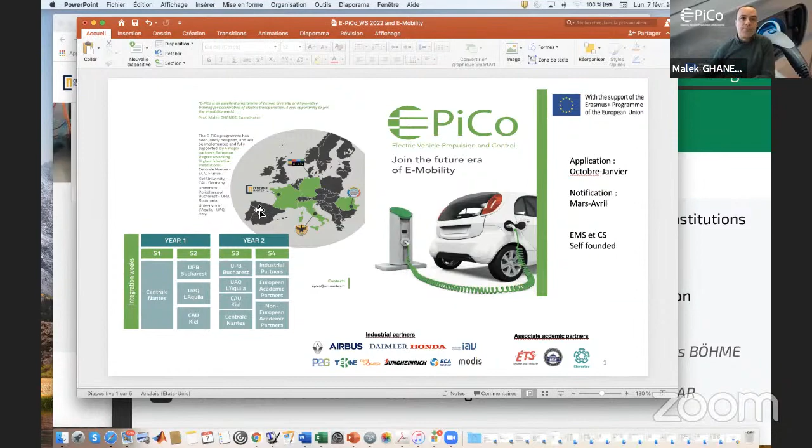So now about the e-mobility control activities at Centrale Nantes. They are mainly focused on the chair program between Renault and Centrale Nantes, as you can see here on the website of this chair. So this program chair is defined around 3 research axes.

The first axis, as you can see here, deals with the control of AC machines and the static converters for electrical vehicle powertrains. So the second axis treats the energy management problem and control of EV, electrical vehicle charging. And the third axis is focused on energy optimization of hybrid powertrain systems.

So the main objective of this program chair is mainly to use advanced methodologies and technologies in the control of propulsion systems in order to reduce the cost of electric and hybrid powertrains, to make EVs and HEVs affordable, while of course keeping a high level of requirements on their performance, operational safety, and reliability.

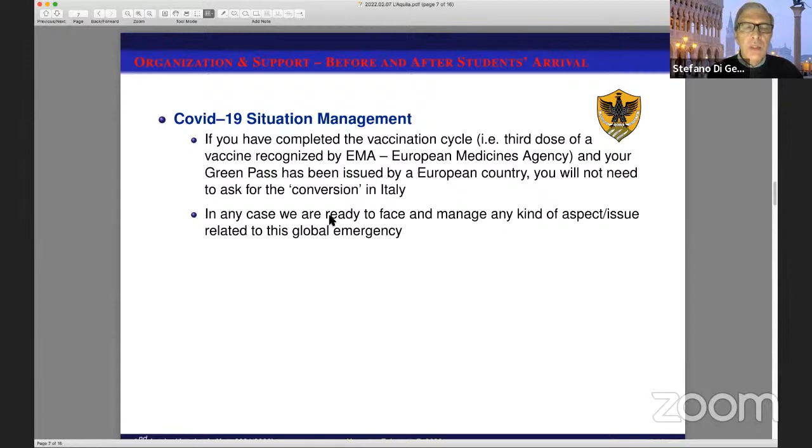I suppose that all of you already got the vaccination cycle. So the third dose, or the Johnson dose plus the booster. So the Green Pass has been issued already in France, I suppose, and you don't need to ask for any conversion in Italy. But in any case, please address to us any question in this regard, and we will help you to do everything that has to be done as soon as you arrive in Italy.

So just to give a glance to the master degree program in L'Aquila, this is hosted in the Master in Computer and Systems Engineering, which has 3 curricula. One is control systems engineering, whose major is automatic control. Then information technology, whose major is computer science.

So just to give a glance to the master degree program in L'Aquila, this is hosted in the Master in Computer and Systems Engineering. I hear a voice. Has 3 curricula. One is... Okay, we had technical problems probably.

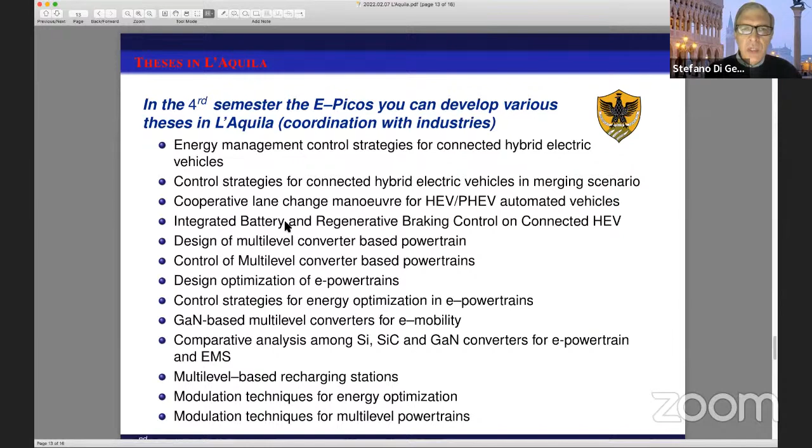Just to give you a quick glance of the educational system in Italy, we have a different way to give you grades, which are numbers from 1 to 30, different from France, which goes up to 20. Then there is a conversion scheme that we agreed with the consortium, in which, for instance, some grades correspond to A, other grades correspond to the letter B, et cetera. So we have a conversion scheme that was established with the consortium.

And yes, I'm the coordinator, Stefano Di Gennaro, coordinator of E-PiCo in L'Aquila, but there are other people that work with me and in collaboration with me, starting from Letizia Giorgetta, who will for sure give you a lot of information and help during your stay in L'Aquila.

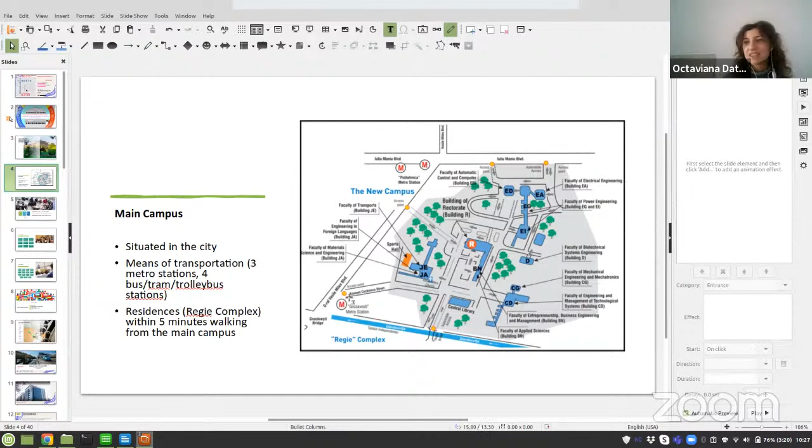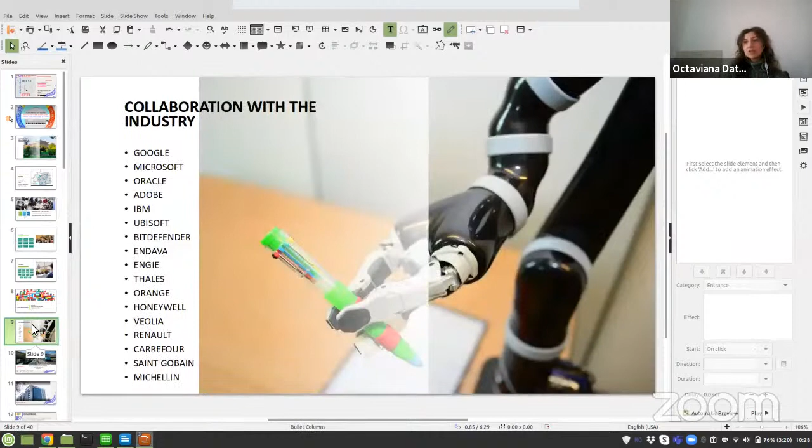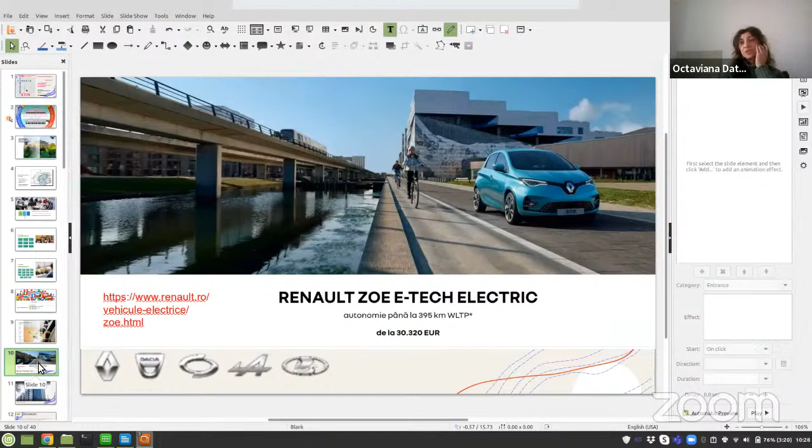Our faculties offer bachelor, master, and PhD programs in several domains. You can visit all the campus, and also participate if you want in some of the scientific activities of all the faculties. We have several programs in Erasmus Mundus, double degrees, European projects, and also multiple industrial partners. Among these partners, we are surely interested in vehicle partners. So Dacia Renault is one of the greatest industrial partners.

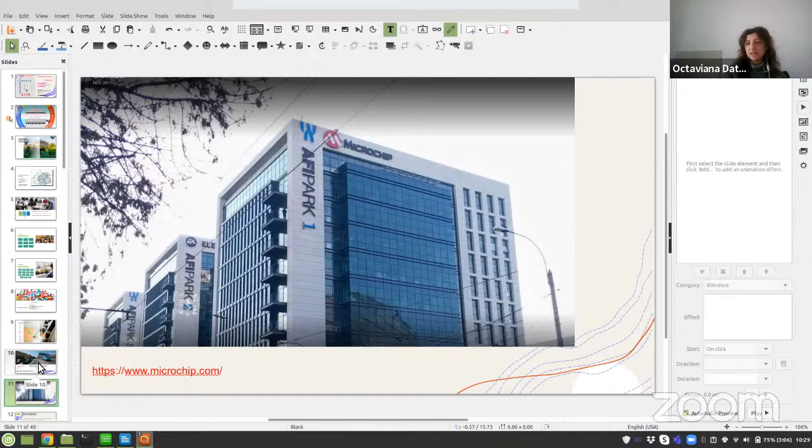Also, Microchip, located a few steps away from our faculty, is a huge industrial partner, who can organize internships if you want. Later these days you will have one of our collaborators talking to you about their activities in Microchip. You will also have my colleague Lucian Perișoară talking these days about the laboratories we have here.

About the electric vehicle propulsion and control local master program, I'm sure you already know that the first 2 semesters are a common curriculum among the academic partners, and the 3rd semester, as you already know, is a specialization semester. So here we have organized a little bit our objectives for this master program, but my colleagues already told you about them.

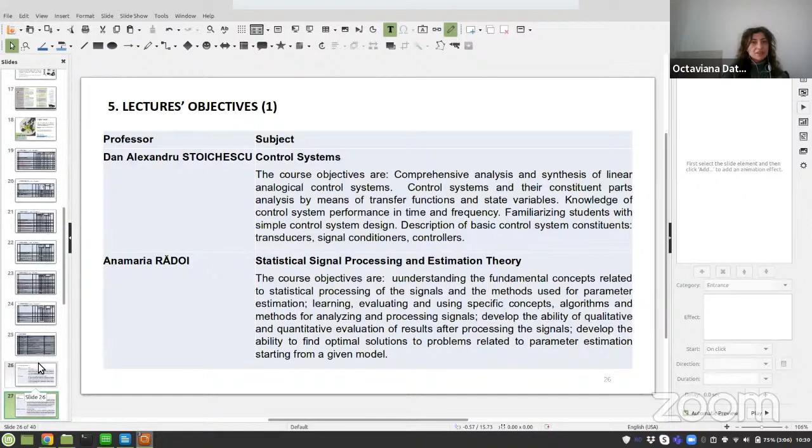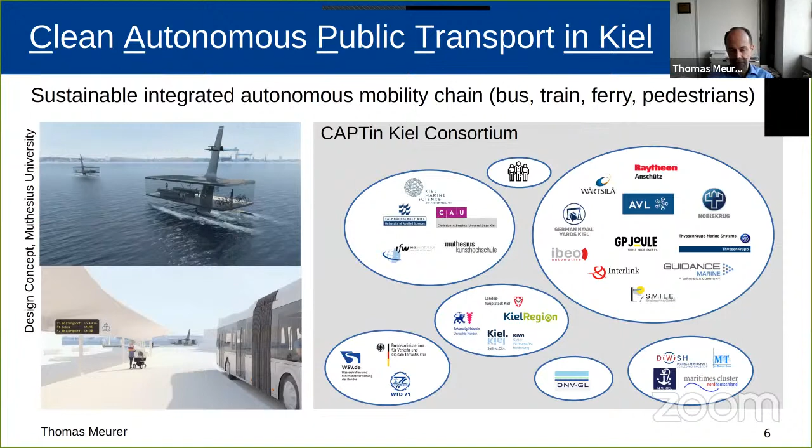Just very briefly, you will have the opportunity to go to Kiel in the second semester. Here we cover different modules addressing power electronics, nonlinear control, and also electric drives, plus a bunch of elective modules that you may choose from.

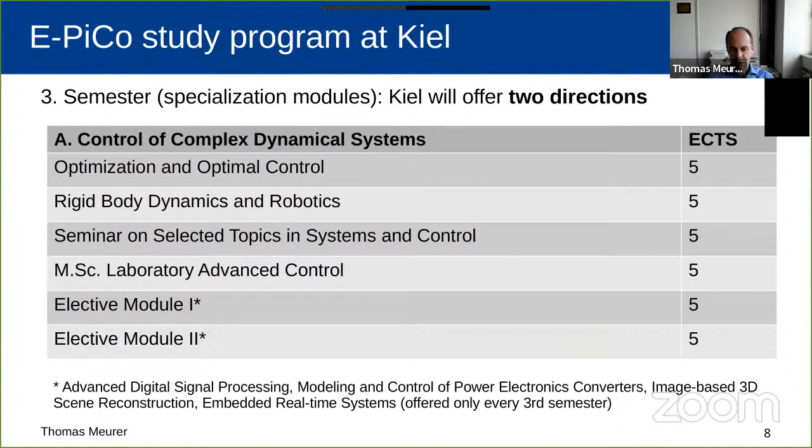If you spend the third semester here, we offer you two directions. I'm responsible for the area about complex dynamical systems and their control, where we look at different topics from optimization to mathematical modeling, and advanced control concepts, plus their experimental evaluation and implementation. The second branch is about power electronics and drives technologies, which Marco LISERRE is responsible for. This is more about electronic converters, intensifying the activities in power electronics, also including a lab plus elective modules. I think this is much more interesting later on when you arrive here in Kiel.

Also, if you come here, you will see that all our faculty is undergoing large construction work. This is due to the fact that we will get a new lecture building that is currently under construction, and also a Center for Networked Sensor Systems, a new research building. Both are going to be built in the next two years. Construction has already started and will go on, as I said, for the next two years, I assume. But then the campus is going to really gain a lot, and we are very much looking forward to that.

Just as a last slide, the team here at Kiel. Besides me, that's Marco LISERRE, who is also going to give a presentation. He's the vice chair of the examination board. Our local coordinator is Dr. Kristin Scholz — you might have already been in touch with her if you have administrative questions — and she's supported by Felix Heute, who is the organization assistant. We also have a website where you'll find our email addresses, or otherwise just look on the web. We are available all the time, and we're looking forward very much to welcoming you in Kiel. Thanks.

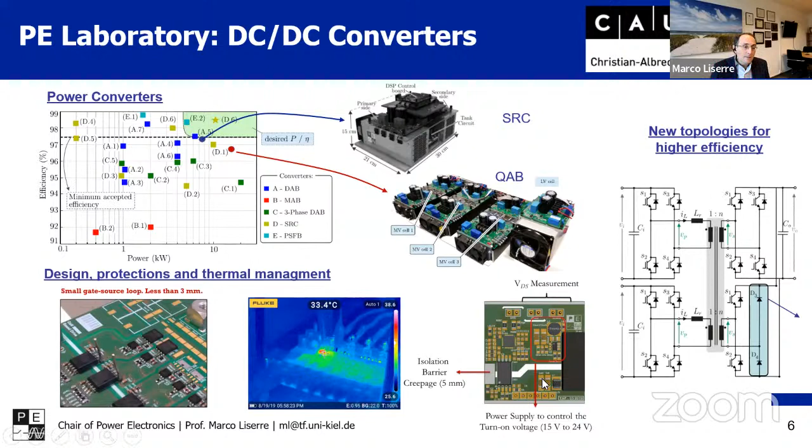That is one example, I say, of the laboratory, but there's also another medium voltage laboratory, which is brand new. We have the possibility to make tests up to 1 megawatt, 10 kilovolts. We have 3 cells, and in each of the cells we can build a different prototype. Charging station is a very important topic here - high power charging stations, we are focusing a lot on that.

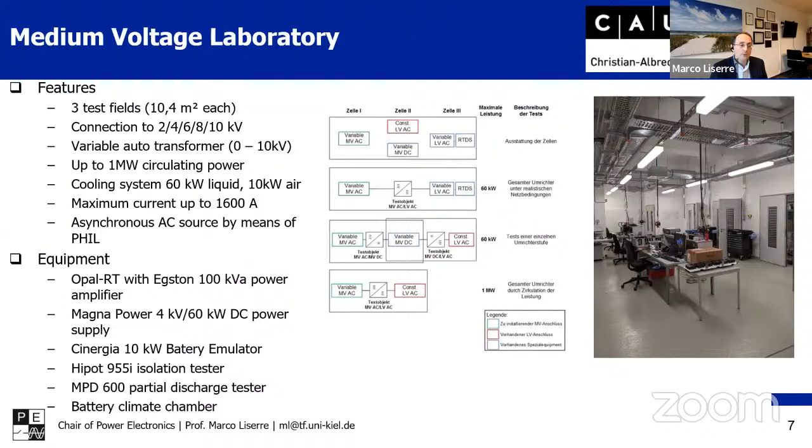This, for example, shows what we have in the single cells. In the first cell, we have the modular multi-level converter, which will be ready in the next 2 years and go into the field to connect a wind park. In cell 2, we have a charging station based on silicon carbide. And in cell 3, we have also another high power multi-level converter. So if you've heard about this topic and have interest, you can come here and make nice experiments with these devices.

We also focus a lot on thermal analysis of power semiconductors, especially in automotive applications, which are subjected to very demanding conditions. We use optical fibers and infrared cameras to analyze the temperature of the power modules. We have a very good relationship with companies like OpSense, a Canadian company, and Infratec, which make these devices, but also with companies that produce power modules like Danfoss Silicon Power, which is in the region, and capacitor producers like MERS and FT-Cap. So I think there's good reason to do that.

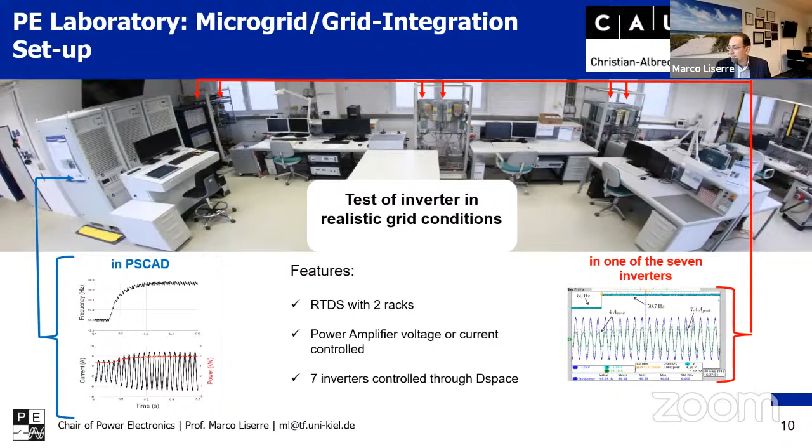We also do a lot of microgrid research. This is a unique setup where you have several power converters connected in a network, and we can test really realistic grid conditions. We also have the smart transformer, which is a flagship topic of our chair, and can also be used as a charging station. In the laboratory, we have the possibility to build a hybrid grid, AC and DC, with different kinds of storage, and test different control approaches for the power flow.

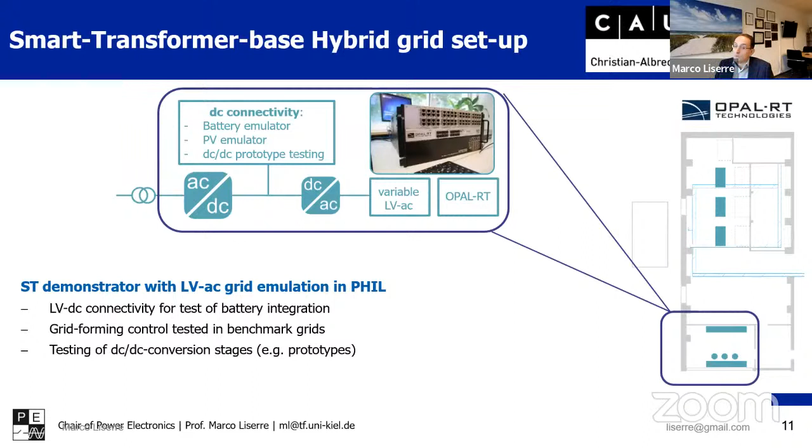And we also build power converters based on GaN, SiC, or both, for onboard and offboard charging.

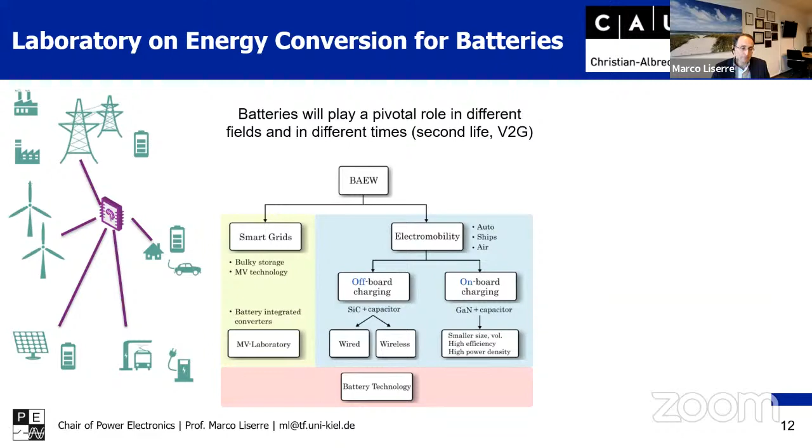A little bit about the research. Again, our strong focus, as I said, is on isolated DC-DC converters as a topic. Then we have multi-level converters, which are mostly used for higher voltage, but multi-level is also taking a lot of place in automotive to create modular solutions.

There are some interesting concepts in which you use the same battery when it's no longer suited for the auto - you can use it at home. So you can embed in the battery pack a power converter, which for the car can be a DC-DC converter to connect to the main DC bus. Then when it's no longer used in the car but used at home, it can create an AC signal to connect to the AC grid. So you can create a very flexible power converter.

Then, as I said, we focus a lot on reliability. This is a big challenge that has been driven by the field of automotive. I was in Aalborg when there was a strong push to look more into the reliability of power converters, because it was noticed that many other fields made significant steps forward in having extremely high reliability standards, but power electronics was a little bit lacking in this perspective.

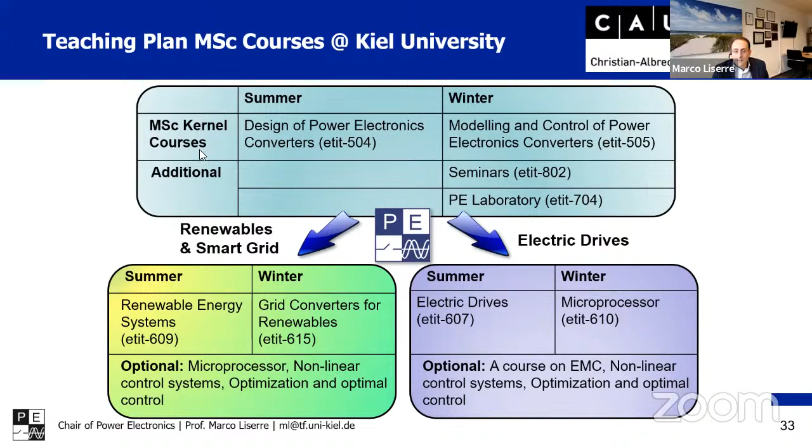I have not to tell, of course, about the E-PiCo. We are also doing a PhD course. We were doing that, and now when Corona will allow us, we will start again. We did it until 2020.

We have several projects at European level, national level, local level about integration into the grid of renewables, charging stations, also a local project like HillFlex. We see the mobility in the city, for example, in ships, because we have a harbor, and so there are coming a lot of ships or buses, which have pantographs and charging stations. We look at all these aspects together. And also on the mobility, we have electromobility.

We have a project about charging stations with silicon carbide, and how to protect them. This is the DSTS project, because these devices are switching extremely fast. We have also a lot about wireless charging. As I say, we have something about the batteries for sure. And then we have also a priority program of the German Research Foundation about the use of GaN with Aachen University. They investigate the semiconductor there. So we have quite significant activities there.

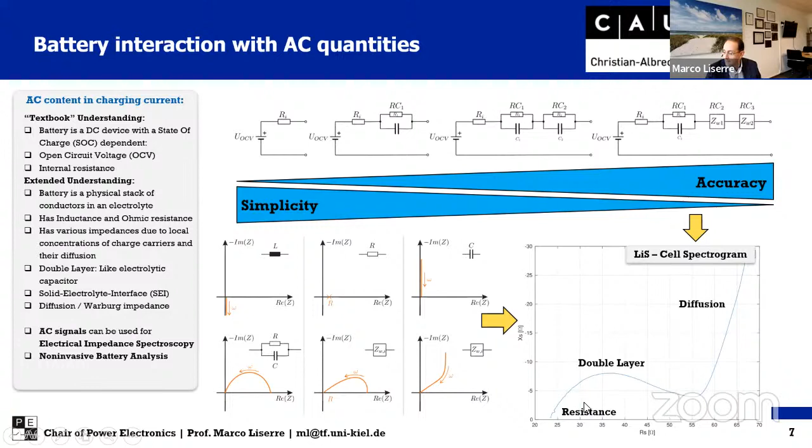This is showing a little bit, and this will be told in the lecture, the many challenges for sulfur cathodes, and they are working currently to solve these challenges, because sulfur is basically an electrical insulator and you have to make it somehow conductive. So this is one of the main things. The good thing is that we work on the charging strategies for this kind of battery, studying the modeling of the battery, and this is the impedance spectroscopy, which we can do here in Kiel and also in the Fraunhofer Institute.

And then we try to develop strategies with pulse charging to improve the behavior of this battery. You can try even to counteract the aging of the battery, because there is this strong push to charge the battery faster, but that is affecting the lifetime of the battery. And then power electronics comes in, because with the charger you can shape the current which is coming into the battery and try to counteract these processes.

So I think that is a nice challenge, because a lot of different knowledge comes together. Material science of the battery, then modeling and identification of the battery with control. Then we have power electronics, because it's the battery charger which should provide this current. So this is a quite interdisciplinary field. Yeah. Do you have some questions? I just wanted to give a little bit about that, but if you come, you can hear even more about that.

No, it's really interesting. And have you applied this battery like in... I can see that you applied some current curves to simulate charge and discharge, but are there some tests to simulate how this battery would be used in an electric vehicle, for instance?

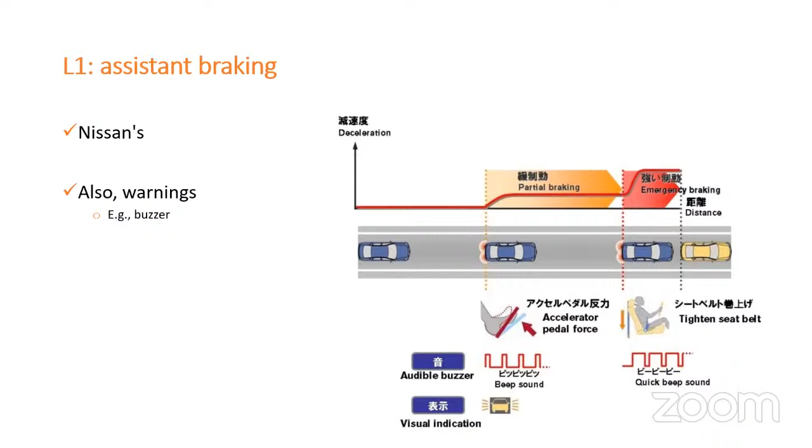The driver pushes the brake pedal, and I simply adapt the force that you put on the brake pedal. So the decision of braking is in charge of the driver here. The amount of force on the pedal is in charge of the automation, which is really important because I don't take initiatives. Lane centering is quite trivial: the car makes the wheel vibrate when you cross a lane.

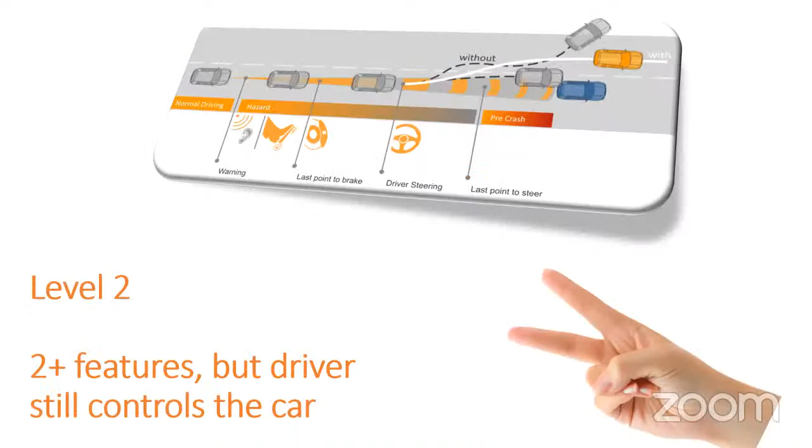Okay. Level 2, you have more than one feature, but still the driver is in control of the car. Level 3 and level 4, the car starts becoming a co-pilot. At level 3, you can leave full control to the car for a limited amount of time. Let's imagine you are on the highway and you want to answer your phone, which I don't recommend now, of course, but maybe in the future you can. So you leave both lateral and longitudinal control to the car for 10 seconds, 20 seconds, not much, or maybe just for the phone call you're doing.

Level 4 means that you identify scenarios and the car is autonomous in these scenarios. What do you mean? Valet parking is the main example. You go to the shopping mall, leave the car in an area, and the car autonomously drives in the parking. The catch here is that the parking is a well-structured environment, and, for instance, no humans are allowed to enter the parking.

So it's very simple because if the car is autonomous, you can have only one car moving in the parking. There are no obstacles, maybe a bird or a cat or a dog, but it's safer than in complex environments where you have humans walking here and there. So this is L3, L4 autonomous system. And L5, of course, is fully autonomous cars, but we are far away from that. And I will show you why.

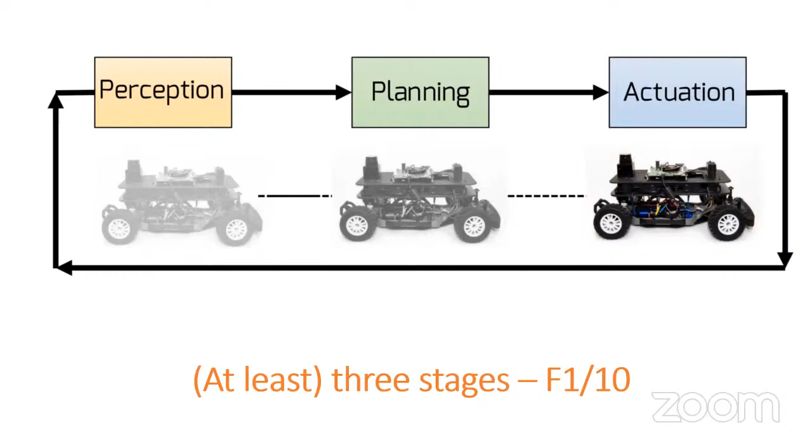And also here you see our prototype, our 1/10 scale prototype. I will show you, because of course you don't really go and prototype directly in the vehicle, you have multiple steps of prototyping.

Okay, things are a bit more complex. It's not only about perception, planning, and actuation or control, it's also about interacting with the environment. So you have sensors, you need to gather data from multiple sensors. You need to localize yourself, because you don't only need to watch what's around you, but you have to understand where you are. Of course, if your mission planning tells you to go to the shopping mall, you have a city map where the shopping mall is, well, you need to know which streets you're on, and this shall be done by sensors.

Okay, I'm not going much into details. Of all these blocks, I will give you some hints and some food for thought.

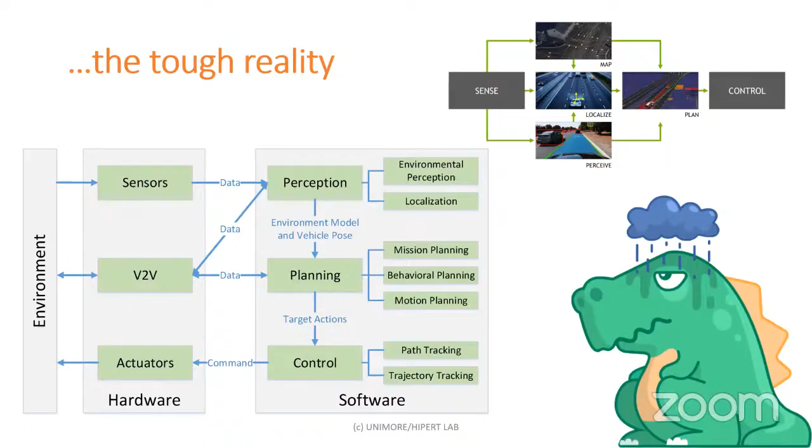And this is mainly done using artificial intelligence, I will go through this soon. Then you also need to identify yourself in a map, possibly at sub-centimeter precision.

You know that standard GPS doesn't really go to this level of precision. You typically have a few meters of error. In the best case, you are under a meter of error referring to your real position, which is not enough for autonomous driving, because having a few meters error is the difference for your car between being in the middle of the street or being inside a shop on the side of the street.

But yeah, we can enhance the perception by collecting data from the city. So this is complex, but we have weapons to fight this battle, you know? This is, okay, let me start from the end.

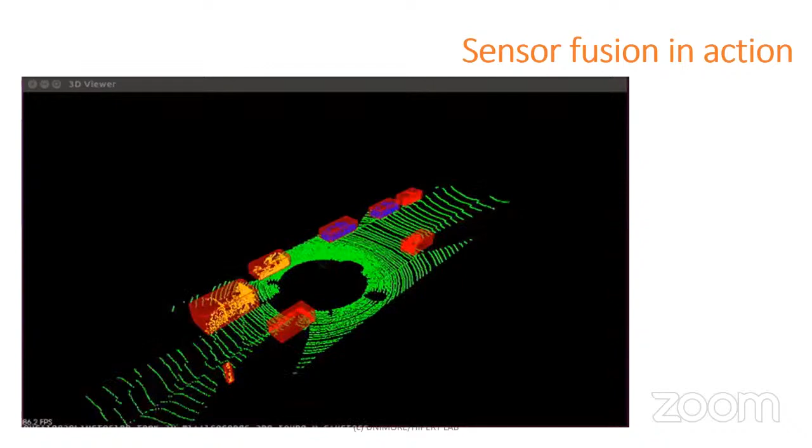This is what our car sees. This is not the best that we can do, but it gives you a good idea of what you get when you do the task of perception. It's not a problem here, it's just the video is slow, but you see around you, you have bounding boxes, red ones, for the other vehicles, but those boxes are flickering, and maybe you don't see exactly everything that happens. So when you design a system like this, you shall definitely start with a good perception block, because if you're blind, there's nothing you can do.

So we have sensors. First of all, you have to choose your sensors. You have exteroceptive sensors that watch outside, like cameras, radars, LiDARs, and you have proprioceptive sensors, like knowing which speed you are going at. You shall know, for instance, the degree of friction and the drift you're doing. If you're going at high speed, you need to know, because maybe if you drift, you want to know that.

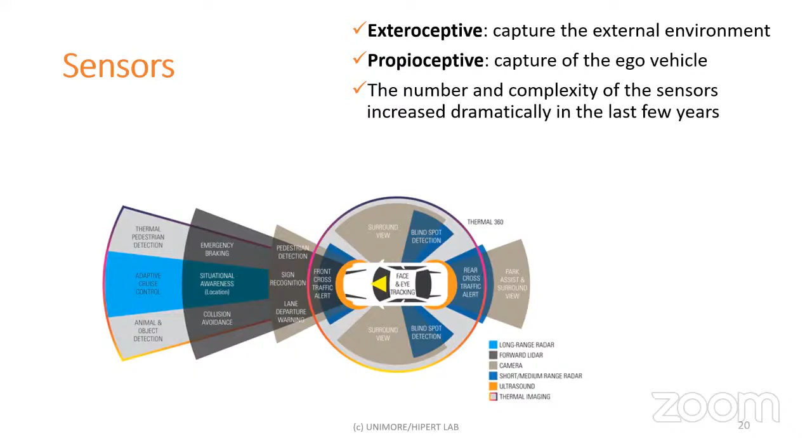The first thing engineers did when they started building autonomous systems was to exponentially grow the number of sensors a vehicle shall have. Typically, cars only 20 years ago had maybe one radar and a few proximity sensors mainly for supporting car parking. Now cars have cameras, a lot of radars, they are shipping LiDARs, IMUs (inertial measurement units), and GPS. So you have a lot of sensors now.

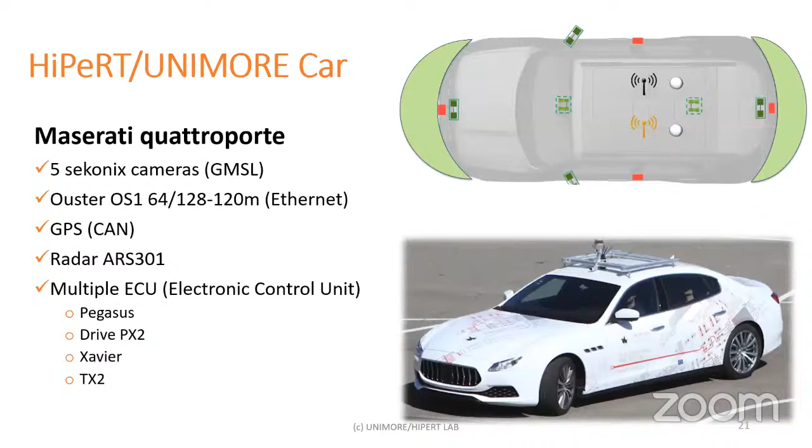Okay, this is our car. As said, we have 5 cameras, 6 cameras, it depends on the setup and the specific project. We have a LiDAR, an Ouster. We have GPS, we have radar, and we have multiple control units, meaning that for every project we have, which are funded publicly by Europe or the Italian government, we may switch to a different control unit.

So why do we sense the world using two sensors? Because both of them have advantages and drawbacks. For instance, camera detection is not really good at detecting distances as LiDAR is, but camera can detect colors and LiDAR cannot detect colors. So you want to take the best of both and fuse them into a common 3D view of your environment, getting the best of both sensors, and you can increase them by adding the IMU, adding radars.

And you can even get data from the city. So objects detected by the city, you can use this information. You remap them into a common spatial reference system, and then you understand and build a very accurate view of your surroundings.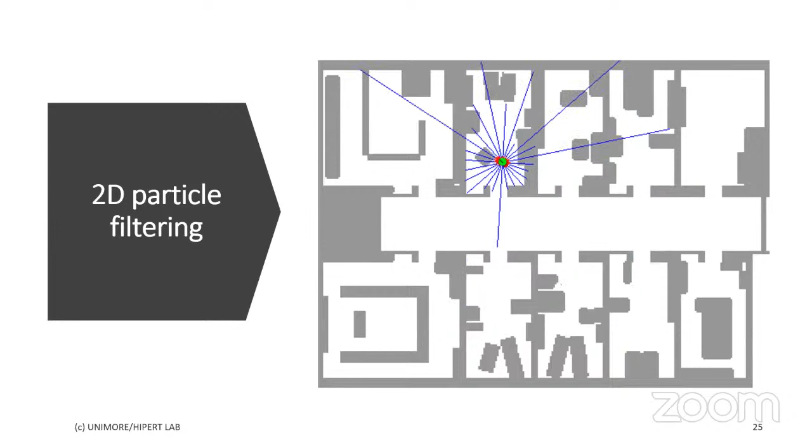This is the 2D LiDAR, we also have techniques for 3D LiDARs. The complexity again is quite high, so you need a GPU or some kind of high performance computer. Now the vehicle, the drone, localizes itself.

Okay, let's go back to the AI. Well, AI, everyone likes artificial intelligence. It's like a buzzword today. I don't know how many professors are here left yet, but I would say it's a very good way also to get funding, because you write AI or machine learning in some project proposal, and apparently people are really willing to fund you. So yeah, we like AI. It's not the killer solution for every problem in life, but yeah, it's very good.

Machine learning is basically a shift in a computing paradigm. Instead of relying on algorithms, as we said, the particle filter and the clustering, you build a computer that can learn. What do I mean? I'm not giving you an algorithm as a computer, I'm not giving you steps to solve a problem in a finite amount of time, I'm simply teaching you how to learn. So I build the computer that learns.

Then I send the computer to school. I give it examples, and I make it work. This is effective, it works pretty well because it's an imitation of the brain, of course. And the human brain, it's actually, well, the reason why we are here is that our brain works pretty well. So I think it's a winning approach.

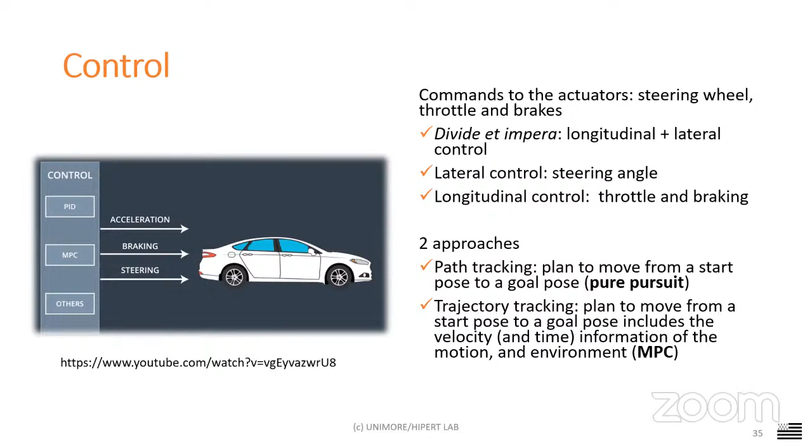So I think there is not much to learn on this side. What's to learn is to do high-level control, meaning I get a path tracking, I have a trajectory tracking, I need to understand how I can follow this path. So I don't really need to control the curve of a braking, the signal of the curve of a throttle, but I need to work at a higher level and to go to drive the trajectory of the vehicle, which

is already computed. The pure pursuit is the simplest control algorithm. It has only one parameter, which is a look-ahead, and it's really, really simple. It's about computing, I think, a cosine and an arctangent or something like that. It works pretty well at low speeds. So if you go faster than 40, 50 kilometers per hour, it cannot be as accurate.

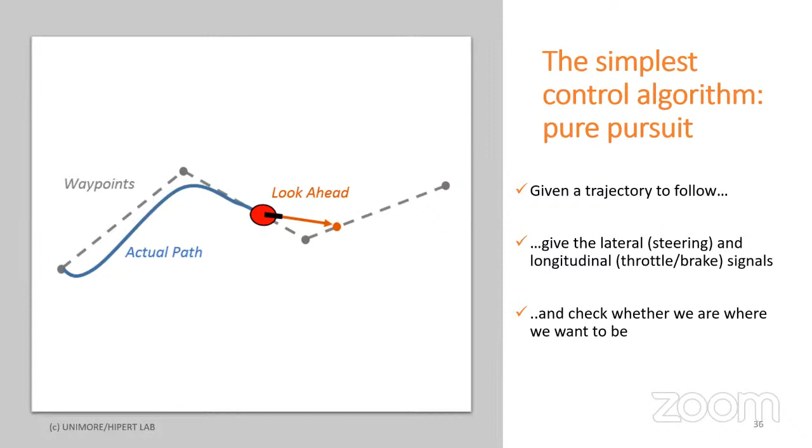Okay. Then it produces the steering and signals. Typically, you produce the steering signal as degrees on the wheel, and the throttle and brake signals as a speed or an acceleration. Okay. And then the low-level control takes care of actuating this high-level control. Well, when you want to do hardcore stuff, we have a Formula Indy car that goes 250 kilometers per hour autonomously. Well, here you definitely need to use some more complex control.

The model predictive control uses sample windows and a prediction horizon, where you check if the output that you predict adheres with the trajectory that you already got in the past. So it's quite a complex one. I'm not going into details of that, but it's the state of the art currently for controlling autonomous vehicles at higher speeds, say more than 100 kilometers per hour.

Note that there are many variants of MPC, but they all boil down to having an accurate model of the vehicle. The faster you go, the more accurate should be your model. So if you go 60 kilometers per hour, you can even have a bicycle model where you have two wheels, one front and one back wheel. So you don't have four wheels in your model, you only have two, and only the front wheel can steer.

If you go to 100 kilometers per hour, well, I promise you definitely need frictions, you definitely need tire temperature, you definitely need the temperature of the ground. Because you start drifting, you have a lot of problems. So you need a very complex model, a very complex algorithm, which is based on this MPC framework. Model predictive control is MPC.

And you have also increased the computational complexity. So you need more powerful computers to do so. And you want to do this in real time. So 60 times per second, 40 times per second, 100 times per second. So this is a big problem here. Optimizing this, I guess most of you are students in control theory or automation, so you should know this, or at least be confident with this. This is not easy. Okay, and we have a lot of work. We have PhD positions open on this.

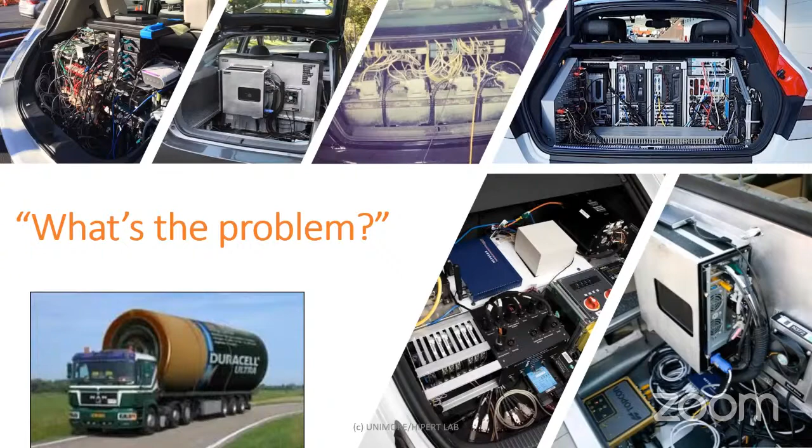This is my question. Okay, I have multiple answers for this. There is no common solution. The idea is that you don't want to rely anymore on what you see in this slide, which is putting high performance servers on board. Typically our computer is as big as a shoebox. These are embedded platforms, and you can have a lot of computational power on them. You may drain the battery with the most powerful of them. They are smaller than this, more or less like this. This was explaining why we need the computational platforms. And then you typically have many-core accelerators like embedded GPUs, FPGAs or ASICs.

So nearly everyone that builds autonomous systems, like Mobileye, Intel, NVIDIA, or Tesla itself, has a high performance embedded computing platform, which ranges from 20 watts, 30 watts, 50 watts, 80 watts, and computes some teraflops. It's not a server, so you can't really do everything that you do on a server. Actually, that's my job. Whenever a guy comes with a very nice solution and says, I have this new machine learning perception solution that works perfectly, I say, okay, but where do you run that? And he says, I run it on a server. And I say, no, that's not the case. I don't have hundreds of watts in the vehicle. I don't have all the space.

The idea is that, especially when you speak of machine learning, you can optimize the networks. You may prune the network, you may quantize the networks and weights, working at lower precision: you don't have 32-bit floating point, maybe you have 16 bits or 8 bits or integers. So you reduce the complexity of the network, you go faster, but then you are less accurate. So you need to tweak the system a bit. You can do it anyway. Okay.

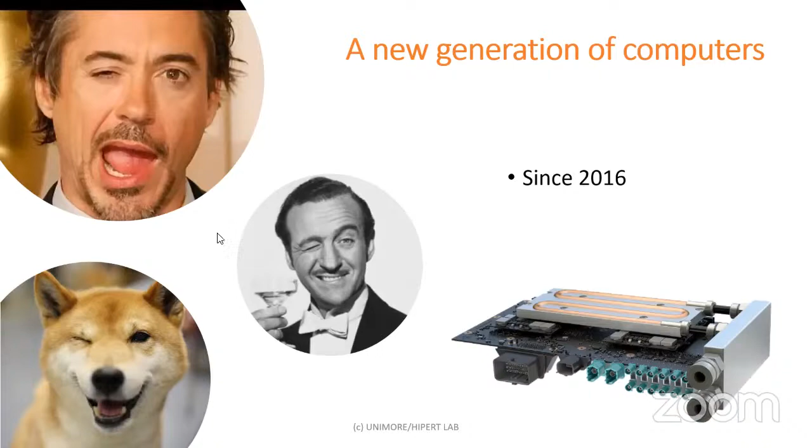First of all, I would like to show you very quickly what you can do, because I treat autonomous driving as a game. There are levels to increasingly become an autonomous driving engineer. You start with simulators. We use video games like GTA, Grand Theft Auto, Assetto Corsa, CARLA, LGSVL for simulating the environment. Then we have the real board that goes on the vehicle, plugged into the simulator, so the computation is done on the board. You have a first assessment of your actual performance, because you simulate the environment on a computer and the algorithms run on the board. This is called hardware in the loop, and most designers do so.

Then you have your algorithms written in Python, C++, or MATLAB. Of course, on board, we only want C++. So we deployed a C++ engine for machine learning, which translates network models from Python to C++, and simply translating the neural network to C++ gives us a 5 to 10 times speedup, because Python is an interpreted language and C++ is compiled. I will give you the details. It's completely free. Let me check. This is the guy here.

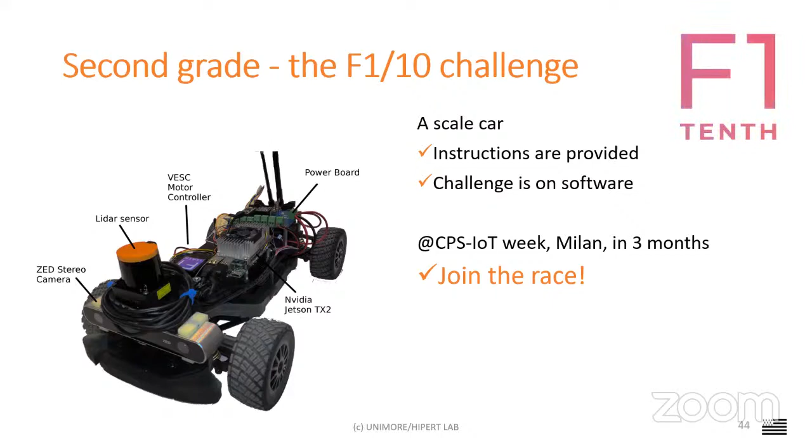Then you go to the real car, which is called the Formula Student. Everyone can join the team. Everyone can join the competition. It is for students in universities. So you can set up a team in your university and join. The teams are self-managed; MMR Driverless is our team in Modena. So us professors are just advisors. We don't really help the students in doing tech stuff.

Then you join this team, you have 3 or 4 races per year, and then you miss probably 1 year of your career, but then you have a very good CV. Okay, you build a full autonomous car in your university, and you participate in races. You need marketing, you need management. It's not only about tech stuff. It's having a real team.

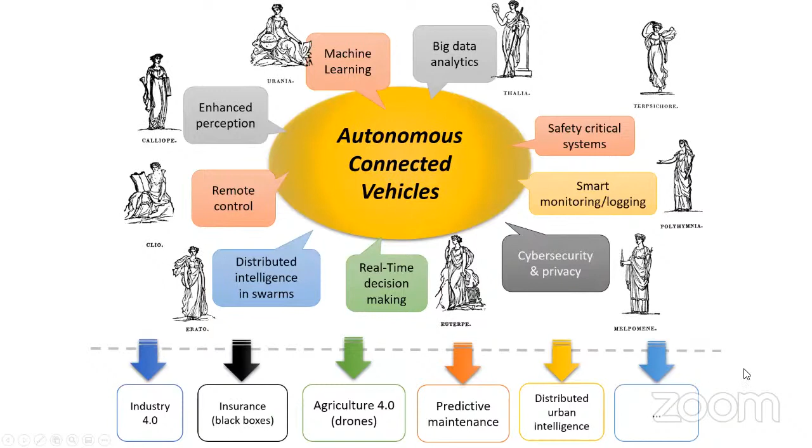I'm pretty much done. And you have a lot of stuff around the connected vehicle, so I'm not going much further, but this is a huge world. So there is room for everybody. There is room even for law, for ethics, for society, for technology. Because now, who takes the insurance of an autonomous vehicle? Who pays for the insurance? I don't know. If you crash, whose fault?

Of course, not of the driver. It's maybe fault of the computer, maybe fault of the LiDAR. So this is a big problem. A moral machine is something I recommend you to watch. But I'm done, so I hope I finished in time.

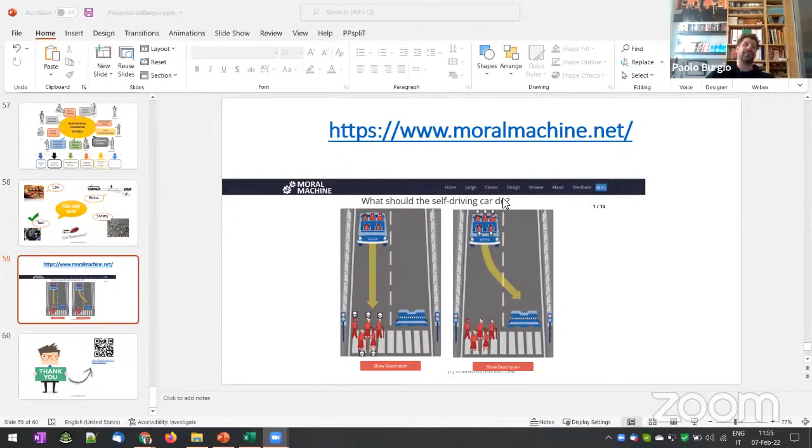Yeah, very good presentation. Thanks. Thank you very much for this talk. Very interesting talk, and to share with us, and of course with our students, the possibilities to work with your company, to do an internship or a master thesis. So thanks for inviting. And also, as said, we can even start cooperation among universities. For instance, we already have a couple of ideas with Stefano Di Gennaro for joint internships between Unimore and Univaq. Yeah, good. Interesting.